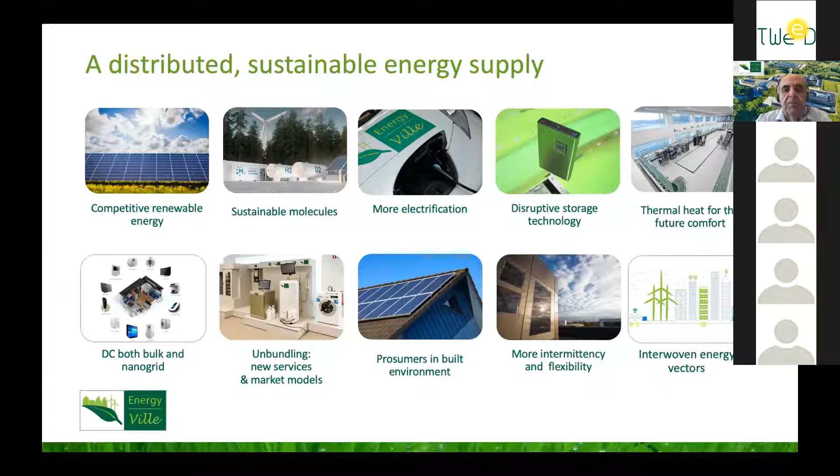So we have the thermal energy that can be used, for instance, as a storage device for electricity, but also we need sustainable molecules. Part of it being hydrogen, but also other parts being methanol, methane, etc. So this is what we are working on.

And dear friends, let's be clear, what the Commission has said now, being 50 to 55% of CO2 reduction by 2030, will mean more than the clean energy package, which stated 32% coming from renewables. It probably will end up with 40 to 45% of the energy coming from renewables by 2030, which will probably lead to more than 2/3 of the electrical energy coming from renewables within 10 years. So the whole debate in Belgium of how many percent X and Y we are going to have is a very futile debate.

The thing is, let's work on it and see that we can get to that 2/3 of renewable energy in 10 years. This is a challenge that in my long career has never been raised by the politicians to our sector. So really, it's a very major challenge. We have to do something about it. We have to look also at the energy efficiency.

And we are going from that classical model, we all know, to a new model with a lot of energy vectors, but also a lot of data. And I don't have to bring you in detail on that. But if you go to the overall idea, you see that in the energy system which was before, you get 3 energy bills at home every month, or every 3 months, or every day partially, being the energy bill for the car, the energy bill for the heating, and the energy bill for the electricity. Those 3 energy bills will be brought into one.

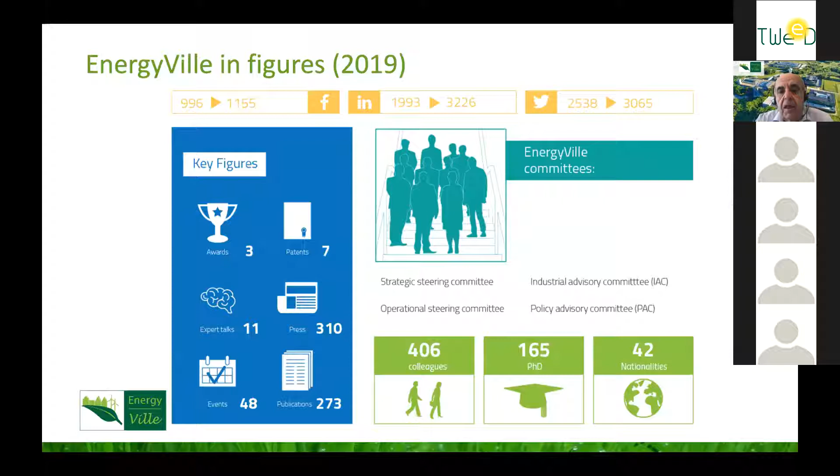On the site, there are roughly 2,000 people at the moment. It's going to be growing. CMI, Cockerill, is also investing in a new building together with LRM on Industry 4.0. So the place is booming, I think. And if you had been there 5 years ago, except for the old to-be-renovated buildings, nothing was there. Everything was built over the last 5 years. So if they say that China can do things much faster, that's true.

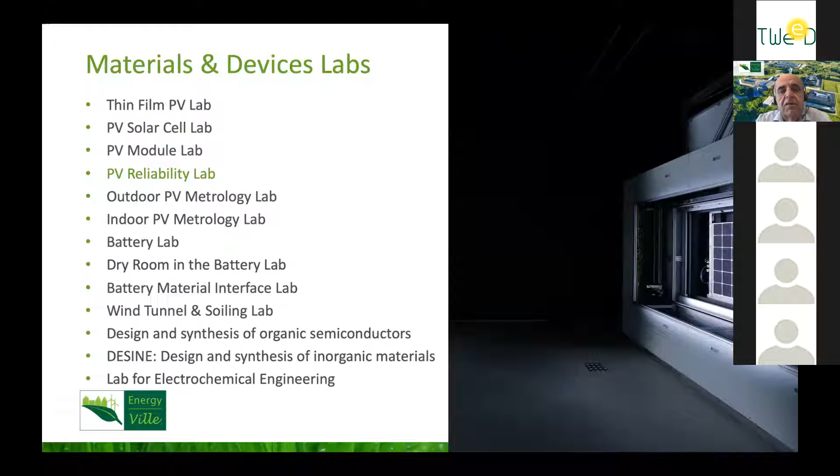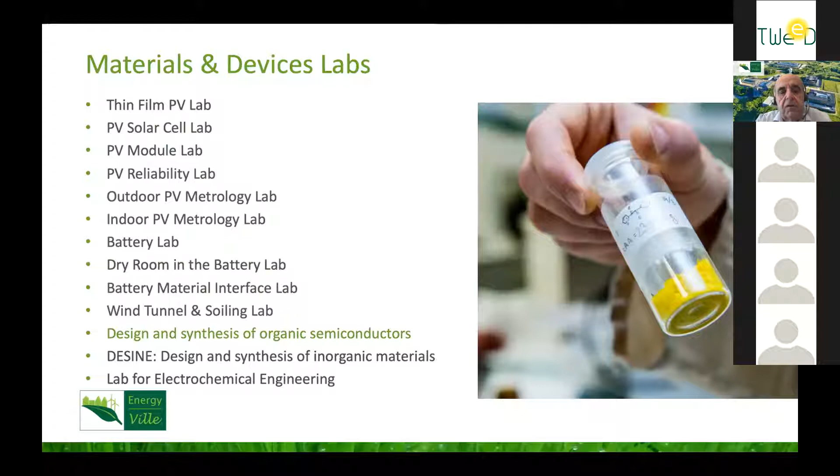We have a laboratory on material and devices with thin film PV lab, the PV solar cell lab, the module lab that's around, lab on reliability, and we don't make a distinction between EnergyVille 1 and EnergyVille 2. This, for instance, is in EnergyVille 1; the previous ones were in EnergyVille 2. We have the outdoor PV lab, which is on EnergyVille 1, metrology, again 1, and you see here then the battery lab, dry lab for batteries, interfacing lab, and the wind tunnel, then the design of organic semiconductors and also perovskites, design and synthesis of inorganic materials. Some of the labs are still in Hasselt and also at IMEC, but they are moving.

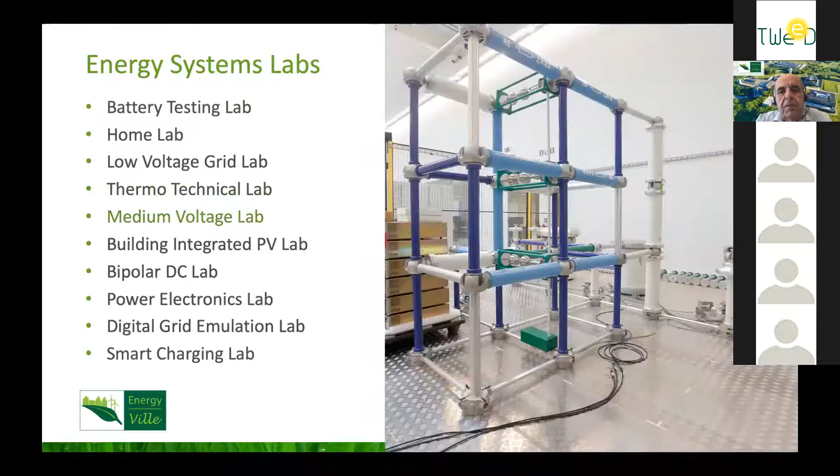Then you have the system labs, the material labs for batteries you've seen already. Here you have the testing lab, which is now being enlarged, and I think that the movie you will see later on, the visit you will have later on, already shows the new lab. This is the home lab, where we work with intelligent appliances, low voltage lab, thermal, medium voltage, the PV integration lab on EnergyVille 2, the DC lab, one of a unique lab in Europe, being totally ready for real applications on low voltage home DC.

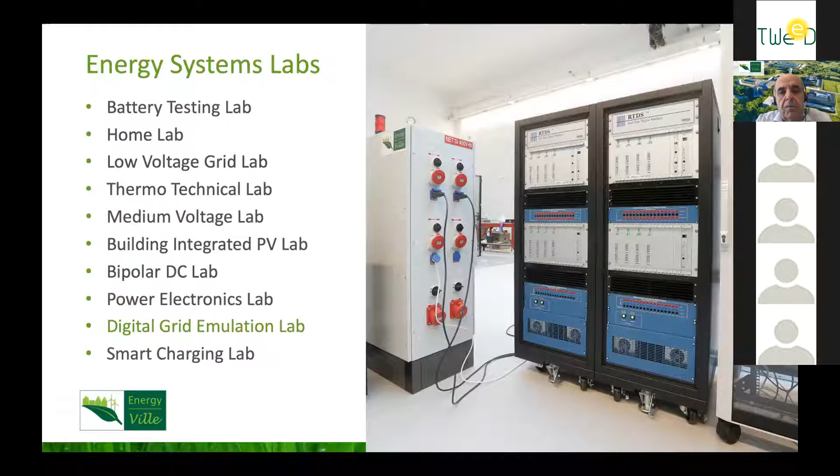And then the power electronics lab, grid emulation. To give you an example, we were the first lab to test the relay on HVDC for Mitsubishi. We're collaborating with a number of companies. And then we have here the smart charging lab, where we use our own vehicles to really play around with what we're doing in charging. For instance, intelligent charging, where the vehicles are charged with respect to your own calendar and the time you're leaving for home.

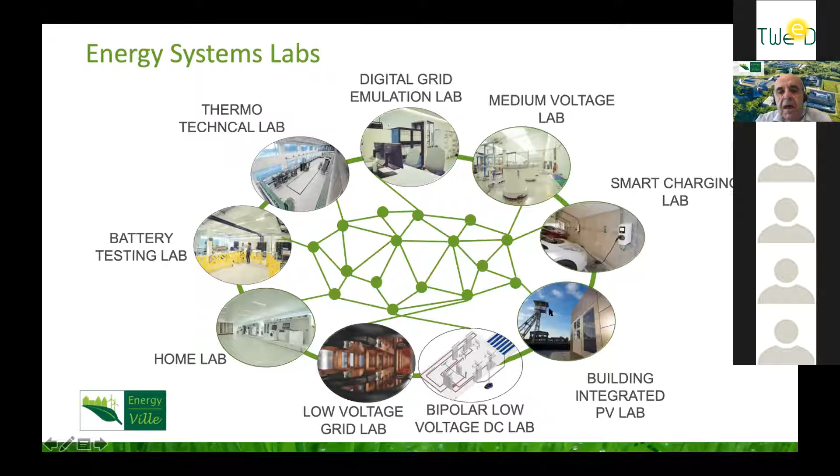So this building itself is a lab. All the labs you have seen are linked to each other. So we can have, for instance, a smart charging lab being supplied by the PV on the roof, by a DC, at the same time being linked to the batteries. And so you have a lab of labs being the building itself. And in the building itself, we are doing an awful lot of research also on energy in buildings. Energy in buildings, and I told you with the comfort being one of the major aims of the energy transition, we have taken on the challenge to really see whether we can live up to our own words, that we could walk the talk.

And EnergyVille 1 has been built to the BREEAM standard. BREEAM is a British standard that stands for environmentally friendly buildings, energy efficient buildings, with a high level of comfort for the people that are working there. So if you look at what's in the building, you have to look at the water consumption. People have to be able to charge vehicles. There has to be room for bikes. During construction, you have to look at the waste treatment. And we were very scared. But at the end of the day, like a student, you go to BREEAM, you ask, is the design okay? And we got excellent for the design.

And then at the end, when the construction is done, they come in to have a check. You are checked continuously. You have to give data in continuously. And we got the highest certificate, outstanding, in the post-construction, and it's still monitored. So yes, we walk the talk, and we are proud of that. And that building is working as we think that building should work. And if we ask our collaborators, maybe they are polite to me and don't want to say the truth, but working there is fun. Getting there sometimes is more difficult.

And then we go one step up. We go to the district design with optimal integration of renewable energy systems, the thermal-electric modeling and network design, to prove that you can better optimize in a district than every individual house. And then we go to fault detection and management of electrical grids, but also of thermal grids. Then you have decision support of larger grids and towards HVDC systems. And then the top of the list is energy monitoring and policies with scenario modeling and training and management in interoperability.

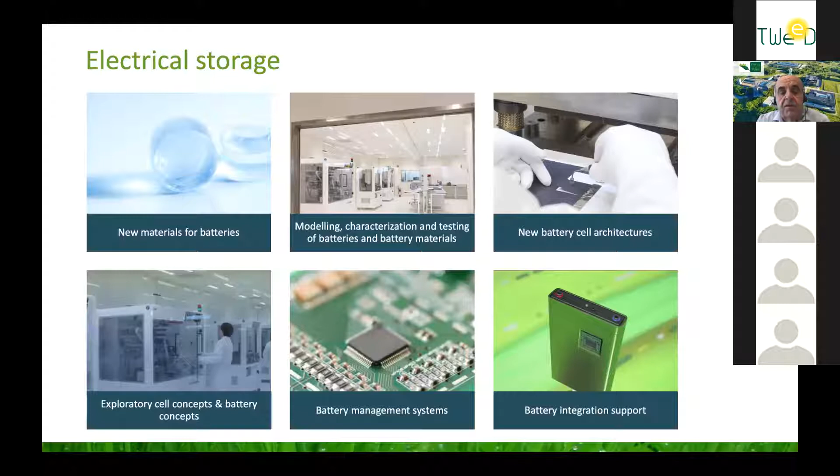To give you an example of people that are interested in that research on BMS, one of the problems is with leasing companies. What is the still available value of an electric car? What is the lifetime left of a battery? How can a battery be used as a second life battery? There, the battery management system certainly will play a major role. And for instance, people that are interested in that are Belfius, KBC, and that kind of companies.

Thermal storage with control and compact thermal storage, integrated storage concepts will be on site. Then power electronics and converters with new materials, gallium nitride, then the magnetic components and reliable converters, but also converters for heat recuperation, low temperature power generation, and heat pump flexibility that then can be used in electrical systems.

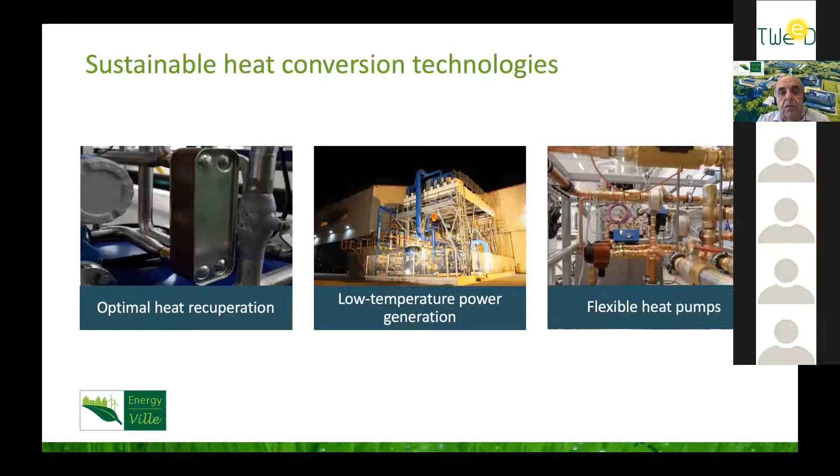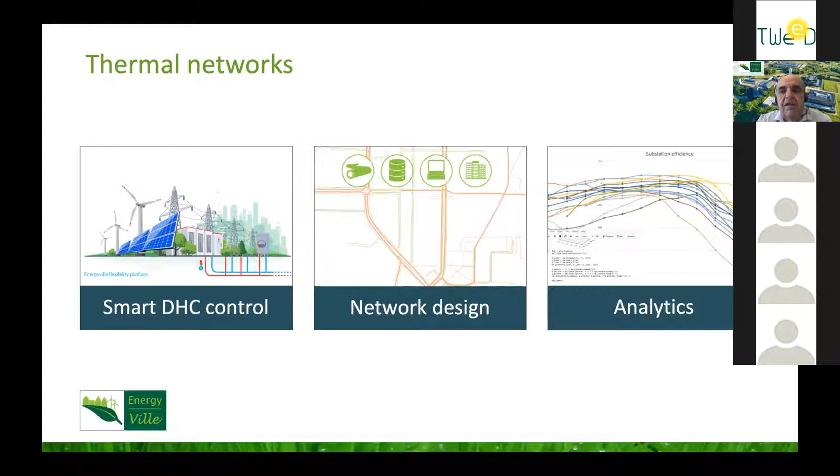Thermal networks with control systems, distributed control systems, network design, and the analytics of substations, for instance, and their efficiency. Strategies and market, with the energy market design, we are doing tariff designs, etc., interoperability, flexibility trading, and long-term energy planning. And also we go to energy policy input.

I hope you have seen that we have a broad system, and I see some questions. But I hope that really you can see that it is an open lab. We are there to serve society, and serving society for us means far more than the local society. So we would like to work together. We are looking for collaboration. We offer what we know, but we want to learn from everyone who is part of the system. We will need brains to do this.

And I see a question of what kind of thermal energy is linked to the PV, a question of Renaud Dachouf. We are now working with Aztec on a mirror type of application for PV, and that will be linked to the thermal grid, and that's where we're going to have the first link between them. We are also going to work on tandem cells, where you in the same moment produce electricity and heat with the same surface. So that's the way they are coupled.

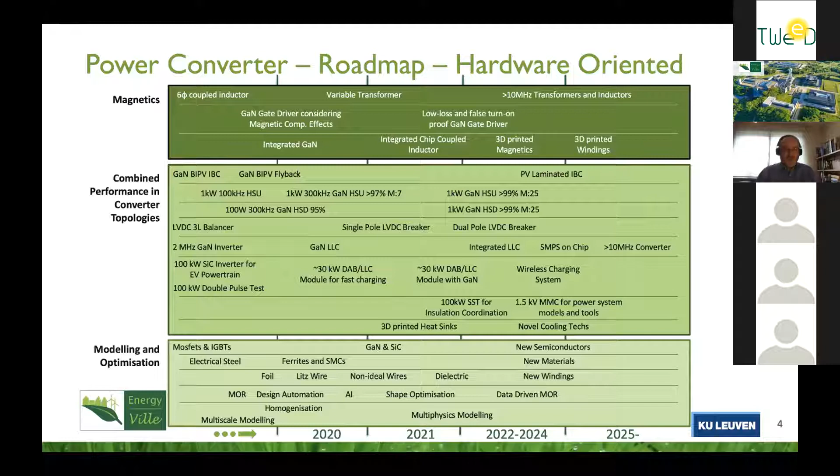There are many classes of circuits. We work on several types, but also several power levels. It goes down from several watts to several hundreds of kilowatts that is being made. And in the back, we have people doing the modeling, design, and simulation of all of this.

Now, the circuits that we recently realized were, for instance, for photovoltaics, we've been making isolated and non-isolated circuits where we try to use the gallium nitride converters to show that we can make circuits that are on average 4 times smaller than the classical silicon solutions. For the DC grids, we've been making balancing systems, balancing converters based on silicon carbide.

There we need another kind of technology as the current levels, especially if you've got protection problems, go up a lot. And in the end, we are now working on a prototype of a small scale MMC converter so that we can study also the medium voltage types of circuits.

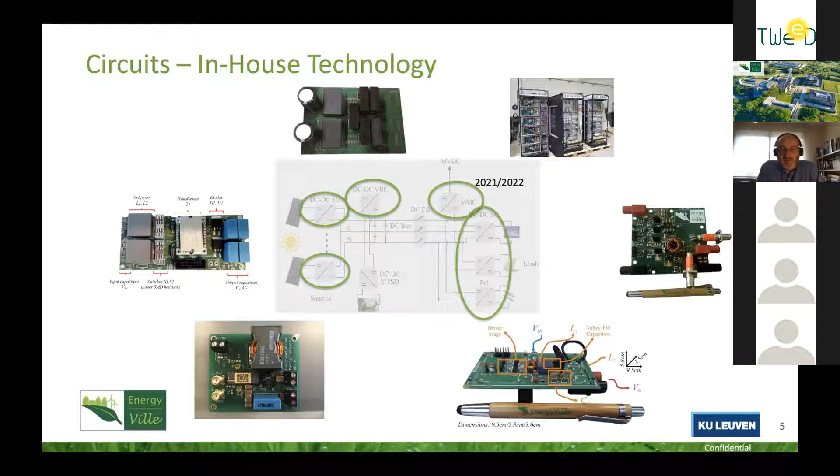On the load side, we go to the totally other spectrum of the power range, where we make extremely small, extremely compact, dense circuits, for instance, to interface small lighting loads, small batteries like charging through USB-C, and so on.

These circuits, they have all found a place in a test facility that we have developed, half of what we call our home lab, and I hope to be able to show you on that virtual tour later on a little bit of it. Half of that home lab, that's where we build microgrids. Half of it is AC, the other half is DC, and there we have created a very unique test facility to test all of these technologies and their interfaces.

We made it a bipolar grid, so that means we've got a plus, a minus, and a 0. This is the most generic grid, and this is also the grid that allows you to go to the highest power levels, because in the end we've got 1 kilovolt of maximum voltage spread. And this also allows us to host a new standardized voltage, which according to the new proposed international standards will be 375 volts.

We have built a system for 100 kilowatt. Currently, we are expanding it again with extra cabling so that we can house a small demonstrator where we show all the typical house loads running on DC, like the kitchen equipment, and on the other hand, the more high power loads for distribution system.

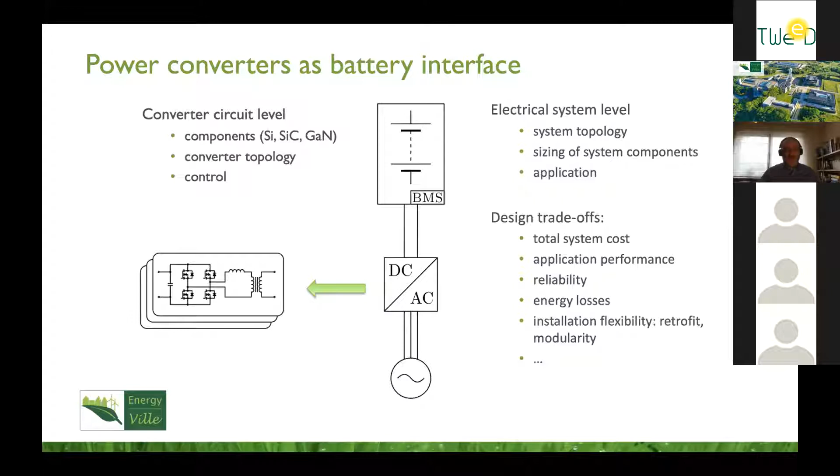Now, if we start from the home, there we see clearly a trend that the classical PV converters that some of us probably have hanging at home, that they will be expanded with a battery unit. There are DC coupled units and there are AC coupled units.

As far as we can see, and as far as we can test what is on the market, the DC coupled units, they behave better, and they have the possibility to be expanded to a DC grid. And then we end up again with our vision that DC will play a much bigger role in the buildings. I think also of the charging of the new electric vehicles.

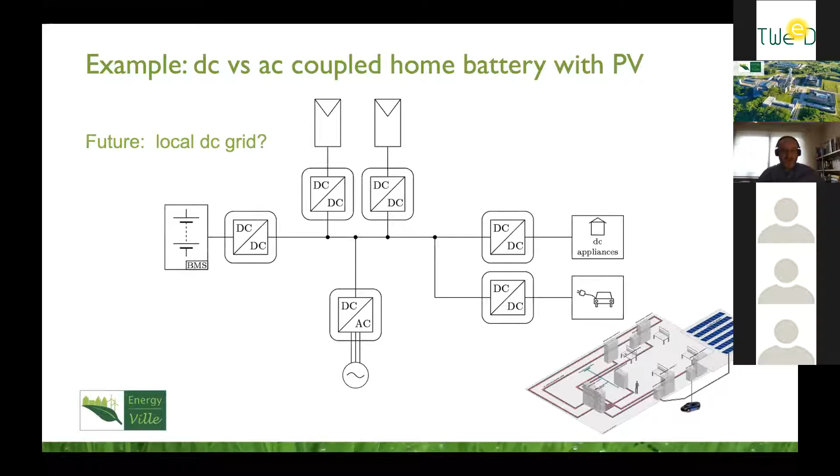Now, of course, we need to address this scientifically. So there are people working on the optimization models, the design models, so that we can find out what is the optimal sizing of the battery packs that you need to put in buildings with PV, what is the optimal interface dimensioning, and given certain tariff structures or other business models, how do you achieve the fastest payback or the best profit out of this system. So here we link also the energy economics with the hardware sizing.

As mentioned by Ronnie before, we try to test this all in practice. So we have many of these systems in the lab. Unfortunately, you cannot have a look at it, but please come over later. We are testing all of these systems in practice. We have got the facilities to do very low powers all the way up to high powers. It's no problem to have a few hundred kilowatts of testing.

We even have a high voltage test facility that is one of the unique ones currently in the country. And we can do a lot of solar related testing with our test tracks and several different configurations of photovoltaic panels that we have on the two buildings for the moment.

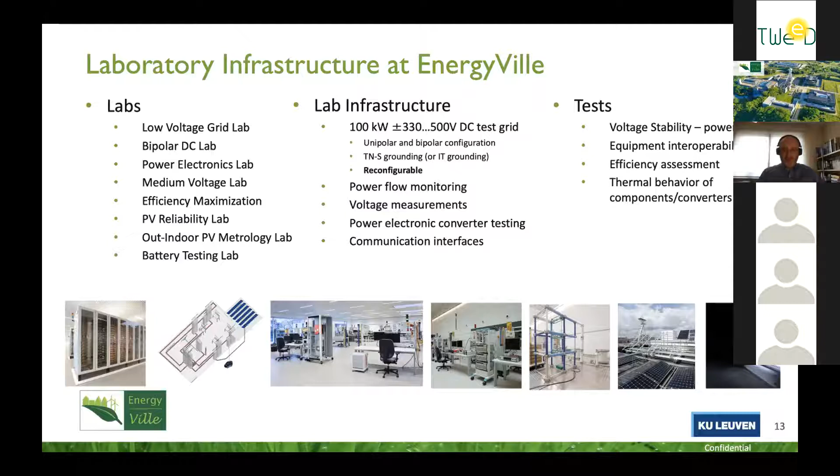Okay, now, secondly, I wanted to present you a little bit about the control aspects, and that's mainly my colleague here, Deconinck, who's excused, who is supervising that, because you can always optimize the hardware, but in the end, somebody's got to find out what you will do with that hardware on the operational side. And there we look a lot at distributed control and the optimized use of the distributed storage assets. Now here's Deconinck and his researchers.

They have, for instance, been looking at the value of the storage, especially considering that you can use these storage systems for several energy-related services. What I, for instance, mentioned before in the frame of the PV systems, that is self-consumption, maybe a little bit of PV, a little bit of peak shaving. But if you go on the ancillary services market, you can also try to value or monetize your battery by offering frequency containment services, frequency restoration services, and so on. The good old primary, secondary, and maybe tertiary level of reserves.

But the challenge is, how do you combine all of these services on the same type of assets? Geert has been looking at this together with Jonas and Bert, for high power batteries, large batteries. For instance, this is a result where they looked at the different control scenarios for a Tesla type battery, so a large outdoor battery. It's actually an existing system in the province of Limburg, and they have been looking at how to optimally use this.

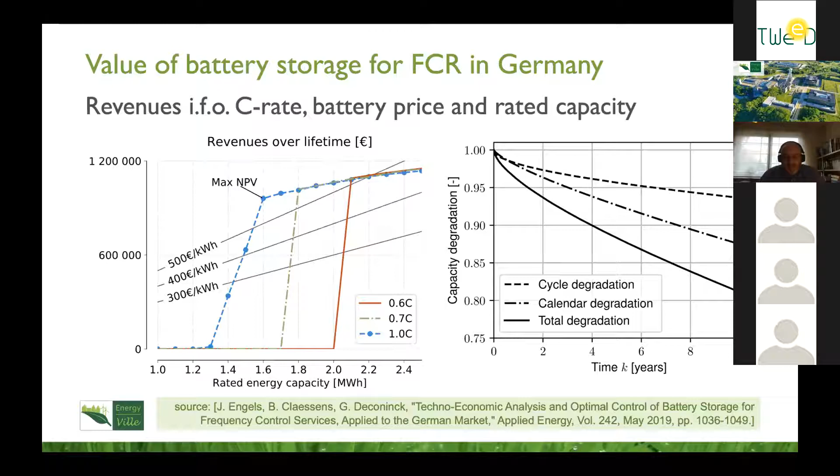This involves a lot of stochastic optimization, and also not just how to make most money out of it, but also how to gently use these assets so that you don't wear them out too quickly. So things like degradation of the assets were taken into account. We did not only look at this problem for the large centralized battery, it was also studied for fully distributed batteries located in several houses. So the problem was expanded then to a large-scale distributed control problem and the related stochastic optimization.

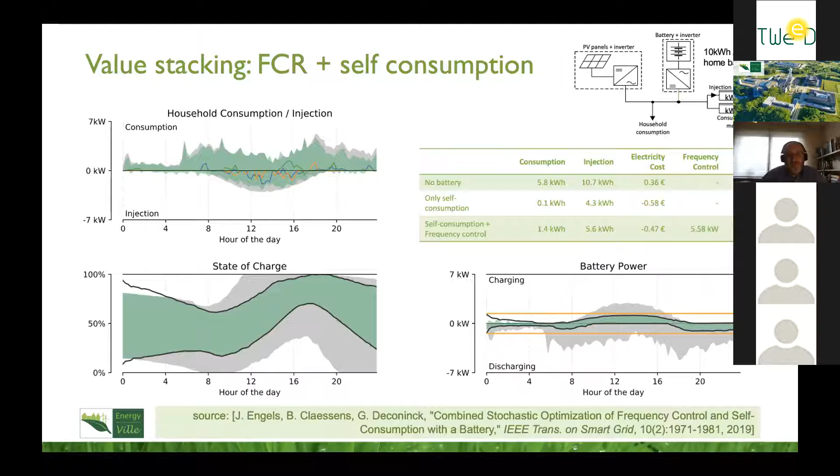And there he could show that you can make a good balance by still implementing the self-consumption goals, which is good for the energy bill with a large peak component, but at the same time the spare capacity can be used to offer reserves. Of course, these things are still in simulation for the moment, but we are doing the first tests with some reference systems in our labs as we speak, to show that these things also work in reality. Now, looking at the time, I'm going to conclude here.

So to conclude the part of distributed control and optimization, this is of course more something that you do on the computer. You need lots of data, good models, but there we complement the work with the people working in the lab and working with the hardware testing very well. We've got data scientists and power electronics specialists who all work in the same teams and learn from each other. We've got the people doing this optimization. We've got the people doing the designs of all the hardware that is needed. So in the end, we can cover the whole value chain from the battery itself all the way to the application, also in EnergyVille. Thank you very much.

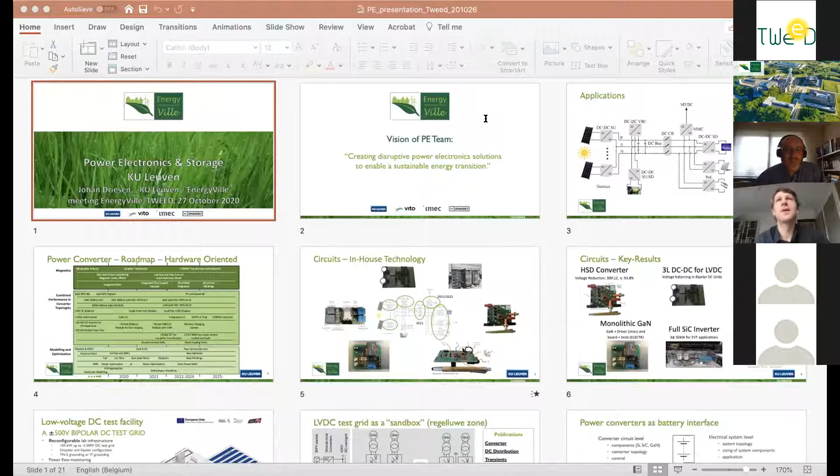I have a question. You have mentioned the DC nanogrid. For the buildings, it's more and more a hot topic. We can suppose that we can integrate all the DC components directly inside the building materials. And so for you, what are the main challenges over there? Because we see there is a potential, but right now the projects that we have in DC are more industrial-based projects. So what are the main challenges in this area? From the market view, it's a mix of technological, but as well security and market.

Yeah, I agree. I know the Miracle project very well. Indeed, it looks more at an industrial feeder. Now we focus more on maybe a smaller scale of DC application, but I think the challenges are very common. The challenges are first of all found in protection and safety. A lot of people, if they hear DC, they still get an allergic reaction because they learned in school that AC is the only safe solution. But I'm not saying that DC is safer. I'm just saying safety is different.

We have shown that you can also do things like residual current detection, fault interruption, but the characteristics of all the faults are different, and we are just learning by doing. And there we have a bit of a chicken and egg problem. In AC systems, they have got 100 years of experience. Here we are working with technology that is developing, and at the same time, there are no clear regulations yet.

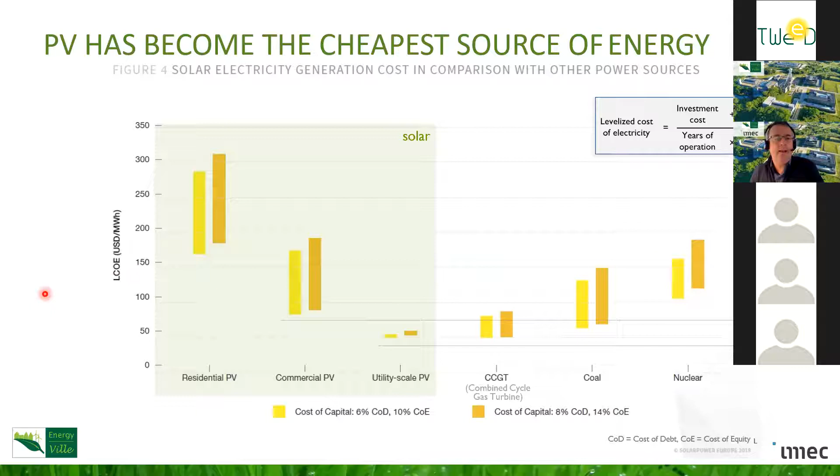are going down. So this means PV is there, will be there, and we have to take care that we can connect it to integrate and take care of the intermittence, similar as we have also with wind, for example. And so an element that is important in this is the storage.

Further integration of PV becomes very important, because next to PV plants, we will have it in residential, we'll have it also in buildings, and Ronnie Belmans in the beginning already mentioned that this is an important development that we're working on in EnergyVille. So PV in that sense becomes a building component where cost is a challenge, and also the flexible customization. And that is something that we're working on together with partners also in Wallonia.

Typically, these building integrated PVs are quite a manual way of working because you have to adapt all the different modules to different sizes, fitting the whole building and the different parts of the building, which all may have different dimensions. And if you have to do this in a manual way, it's quite expensive. But we're moving into a solution where you can do this in a scalable, custom automated way, enabling also for sure lower cost in a fully automated industry 4.0 concept.

We have a tool at our EnergyVille labs, which unfortunately you cannot visit, that allows us to do so. Through pick and placing, we can actually interconnect them in a clever way with a new material and a new interconnection style. We can actually interconnect these PV panels having different dimensions, different sizes automatically assembled, which allows us to bring down the cost of this type of fancy buildings.

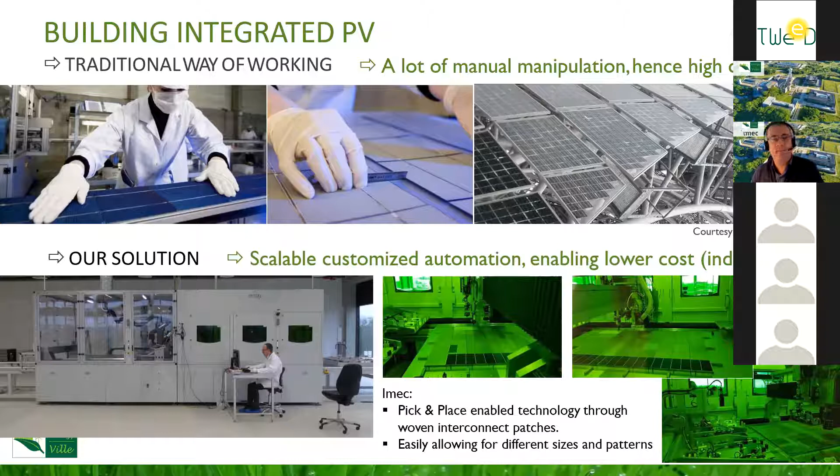We don't do this purely on the module level itself, but also integrating them into the building components together with our colleagues at the KU Leuven. And you might, of course, recognize these buildings here in Genk. So this is an important element of our work in EnergyVille as well. But of course, as mentioned, PV is a key element in renewable energy next to wind and other sources.

And this brings us then also, well, how do you combine this with storage? Because PV generation is mostly during the daytime, of course. And we have energy users also at night and the evening and the morning. And we need to shift the generation peak of PV into these other moments during the day, and batteries are crucial for that. And Johan Driesen already showed some scenarios to manage this shifting of the loads and shifting of the generation of PV into these other moments during the day.

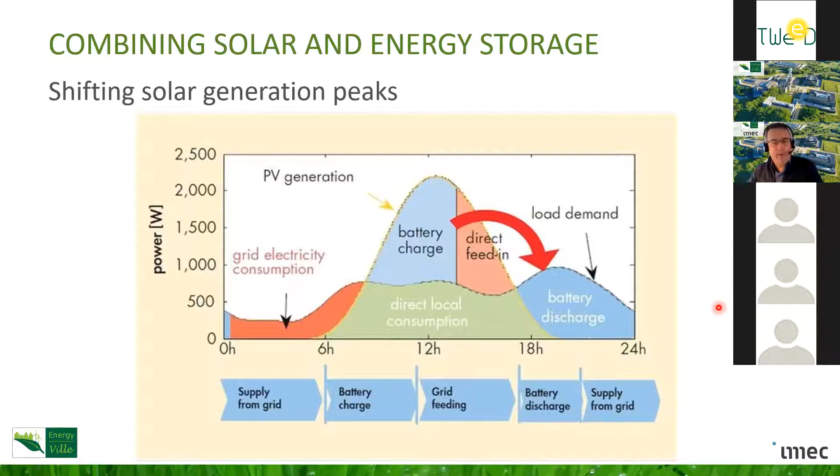Now, if we dig further into new battery concepts that are possible, well, you have to see there's a whole spectrum of battery applications and use. You have the smaller capacity, smaller power batteries and the higher capacity batteries. And with our technologies that we develop in EnergyVille, we can span the whole range. We have on the one hand the development of small, what we call micro batteries, consisting of a thin layer of a 3D structure.

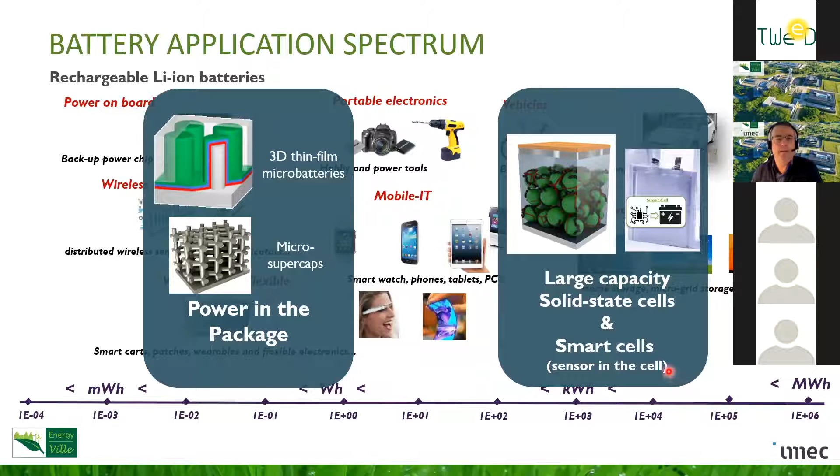That can be used for power in the package for all kinds of small and novel applications, as I will explain further. But what is more important for the topic of today is, of course, this large capacity storage for grid, for automotive, for energy storage at larger capacities. And this is then important to also link this with smarter cells, smarter batteries. Now, how does our new solid state battery concept work?

We can have more energy in the same volume because we have a more dense packing by using nanoparticles. We can even have faster charging, although the electrolyte is the solid component, because of the high ion conductivity that we have in this solid electrolyte.

And we can have a longer lifetime because we have protective coatings that we apply onto these particles or this mesoporous structure, which allows us to guide ions and actually have less stress in between the different components. So these are the basic elements of our new solid state batteries. And what do we want to achieve with this?

If we see the energy density evolution in watt-hours per liter in view of time, we see that these traditional wet lithium-ion batteries are actually coming to a limit. And it's not only us who say that; this is shown by the nature of this type of wet lithium-ion batteries, that they come to a limit around 800 watt-hours per liter. And if we want to go above that or break this limit, we need to move to these other materials. And these solid state batteries are expected to be the technology to overcome this.

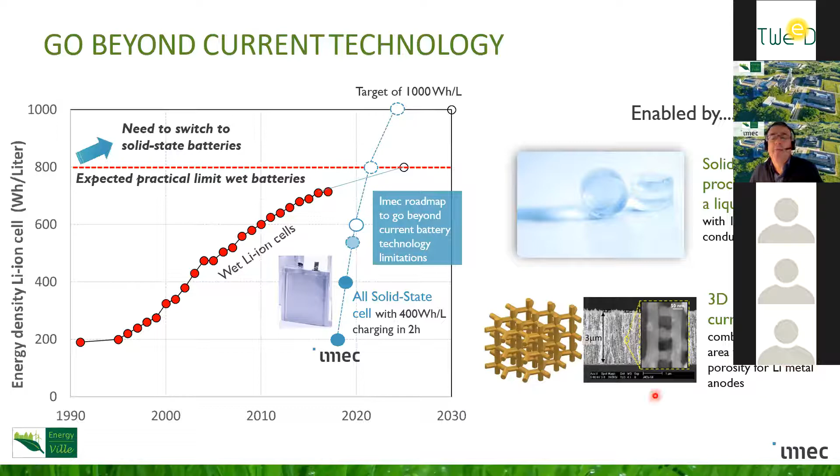Now I have here a movie that shows the concept of the batteries that we are developing, and I will try to run this. I hope the sound will come through, and if not, please let me know.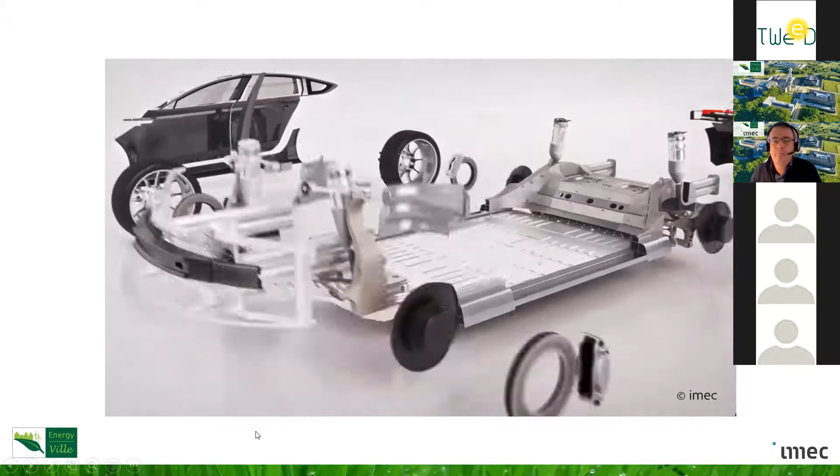I hope you hear the sound. No, not yet. No? Okay. Then I need to switch. Just a second. Just a moment. Let me switch here to the system audio. Sound is better now? Not yet. Or maybe you can speak, just presenting the video. I don't know. Yeah, well, I thought I switched the sound. I thought it was working because I hear it myself, but okay.

Yeah, so we have the liquid precursor that is coating the films. And this makes it compatible with current battery manufacturing, because there wet electrolytes are also used, and we use it here also. We impregnate the film with this wet electrolyte, and then it solidifies. And by the solidification, you make an intense contact between the different particles, allowing you to have this very dense and intimate contact between the different materials.

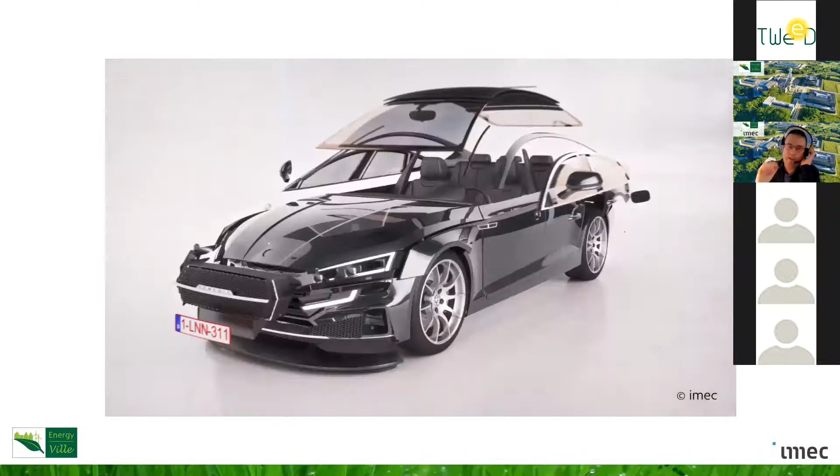And so we have these pores, and these pores, coated with this electrolyte, act as highways for ions, which go from the one electrode to the other. And we don't need a separator because there's a little bit extra of this solid material which forms the barrier between the different materials, the separator itself.

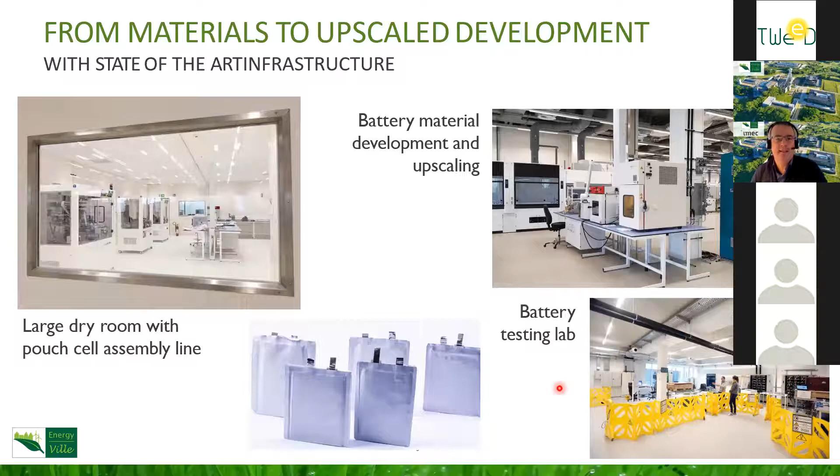Now, as a next step after the battery development itself, we see a future for smarter batteries. In this way, we can further increase the quality, reliability, and lifetime. So making batteries smarter by adding, on the one hand, a closer link to the controller, as Sergio will explain, but also integrating sensors into the batteries and the different elements themselves.

It could be thin film electronics that could be used there, which is a development we do at IMEC, where processors and different sensors can be made on thin foils. And we have also, of course, all the electrochemistry technologies I've shown you already a bit about that can be used for that.

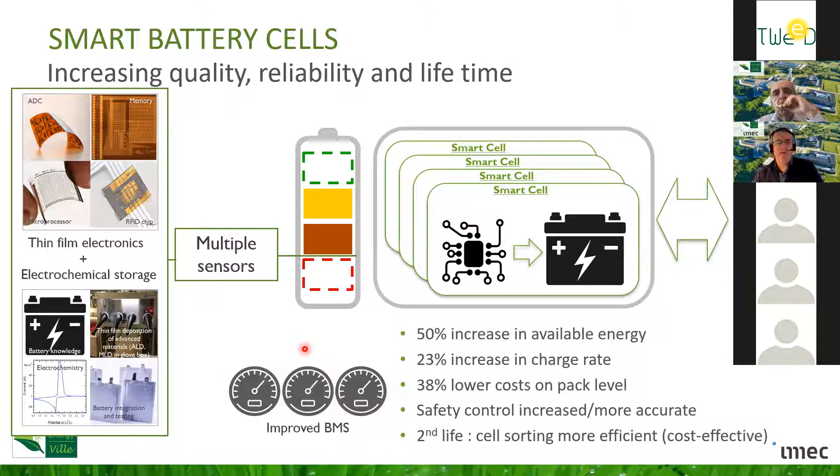And with these smarter batteries, with sensors integrated, we can develop an improved BMS system, as will further be explained, which has increased energy available, increased charging rate, lower cost on pack level, and can in the end be safer to control and to manage. And also towards second life sorting, there is a benefit if you know what has happened to the battery.

Now, apart from the large-scale batteries, as explained in the previous slides, we also work on what we call micro batteries. For micro batteries, we have a lot of material development going on, and important are also the interface layers. Now, if you want to make small batteries, of course, you can make small thin films, but these thin films can charge very quickly, but they don't have a lot of volume, so to say, to have a lot of energy stored in it.

By making these 3D shapes and covering them with those battery materials, we can actually still have the combination of very thin layers which allow fast charging, and in the end a big volume of material that allows considerable energy storage. And we see specific application domains for this, like medical implants, flexible thin batteries for all kinds of IoT and miniature applications. We are, for example, working here on the digital lens where this type of battery can be integrated and so on. So this is a specific market for this type of micro storage that we are targeting.

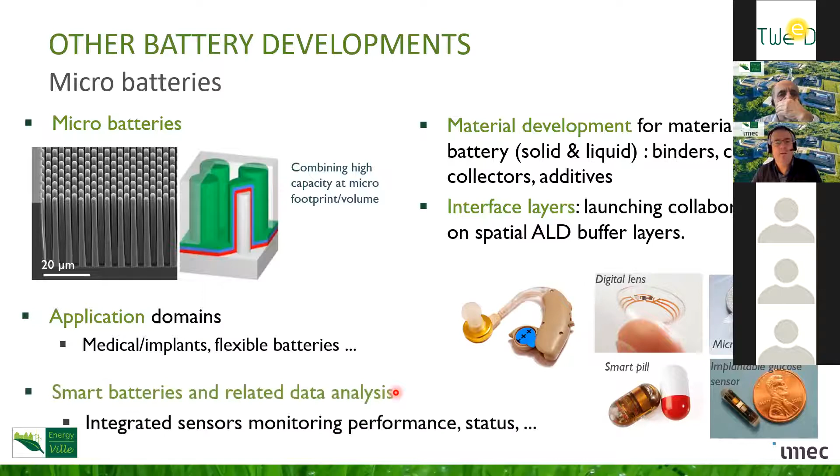So this brings me to the end of this first part, which is battery related, which is more for what you could call shorter term storage, which is essential, for example, in the day-to-day storage for electrical vehicles and so on. But if you want to look further ahead, there is certainly a need to do more, to have longer term storage. And if we can combine this also with using the carbon from the environment to transfer and utilize into this new kind of renewable energy fuels, that of course is an excellent advantage.

And electrolysis is a key technology block for that. From there, we can actually use renewable energy from wind, from solar, and transform this into these new energy sources, hydrogen and other carbon-based chemicals for the industry, for mobility, and for consumers. The key element is the electrolyzers, as mentioned. I won't go into detail. I think from our chemistry and electrochemistry courses, we are all quite aware of how this works.

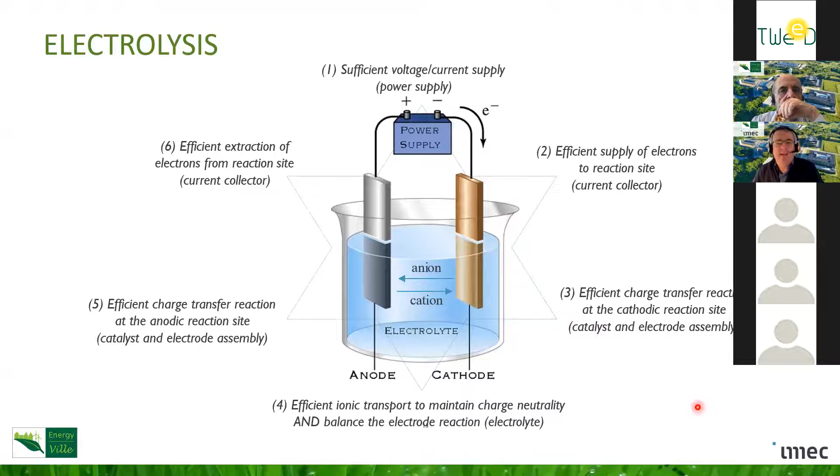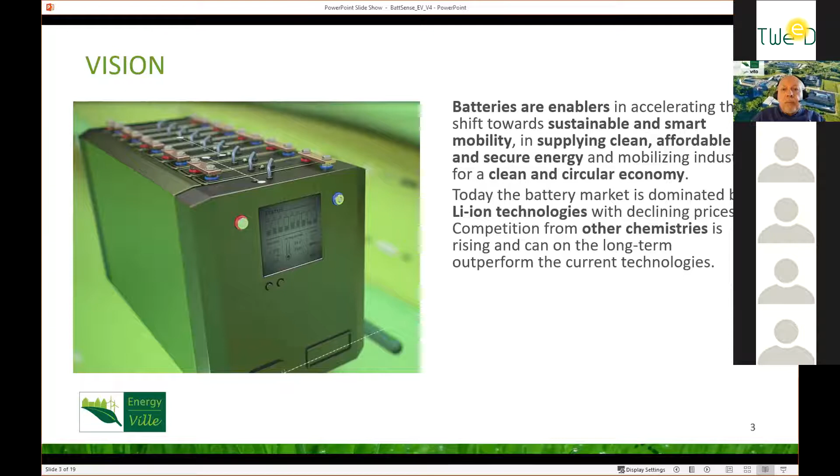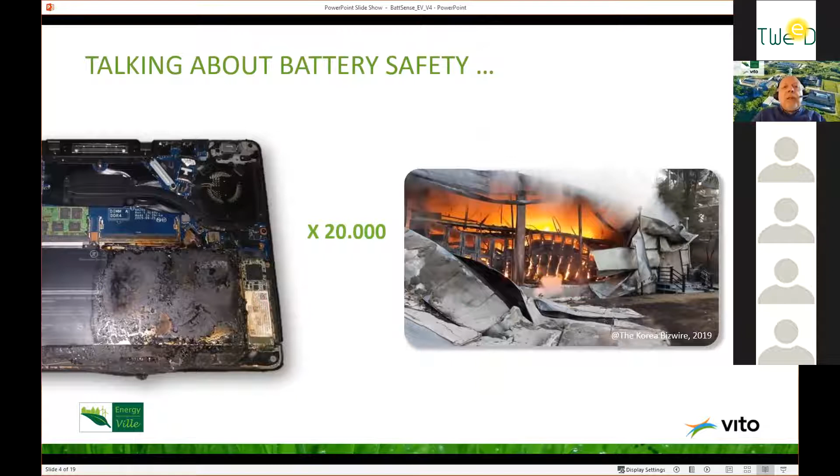And if you multiply that by a factor of 1,500 cells, it looks much uglier in terms of the results related to safety. And imagine that you multiply that by 20,000 in a battery container. What can happen? So safety is a critical aspect to operate lithium-ion batteries. But it's more than just safety alone within the batteries.

Think about electric mobility in cars. You want to have some certainty in the range. So you want to maximize the range so that you can still move yourself with the same perception as you had with traditional combustion engine cars. But it's also related to, yeah, we can't wait that long to charge the car, so it needs to integrate fast charging as well. These are additional aspects related to storage.

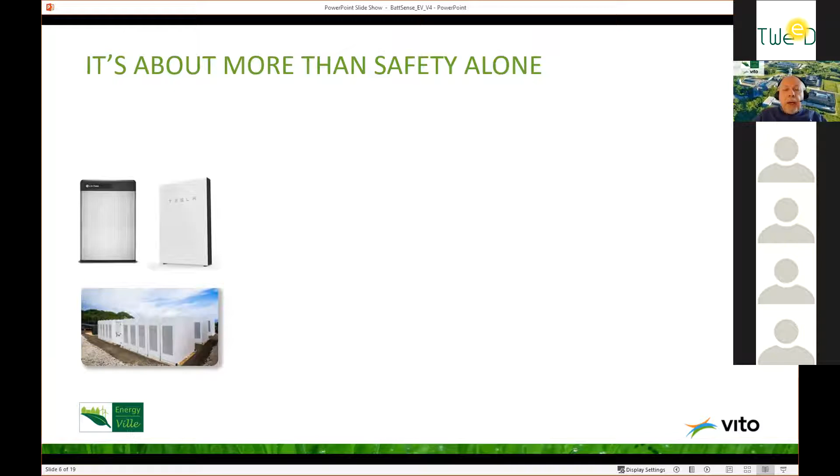When we look into stationary equipment, there is a higher share of renewable energy and, of course, intermittency that needs to be absorbed. But it's only worth implementing if you can increase the revenue generated by the storage capabilities. And finally, we want to maximize the lifetime of the battery. So it's not only repurposing that is important, but also the fact that you can use batteries longer in the first application area.

So therefore, we need to add electronics on top of that, which is called battery management systems. At Vito, we developed BattSense, a battery management platform, a concept that can serve all different stakeholders in the battery business. We concentrate the BMS development on sensing, high voltage control, and protection for the safety elements. It delivers a lot of diagnostic information. It also interfaces to the outside world and to the energy management system, and it allows the batteries to perform better.

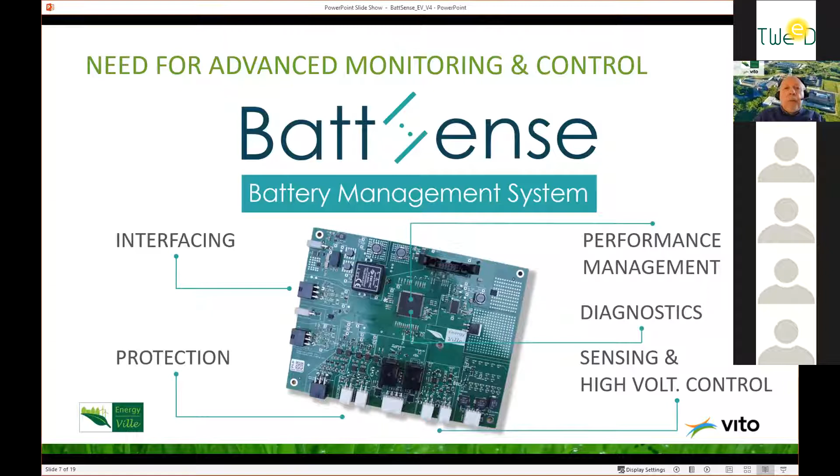So with the BattSense platform, the purpose is that we implement the solution that you need, and it's not always aligned with what the customers are asking. This is what we are going to illustrate here. The BattSense platform is a modular master-slave design configuration, and it's flexible in hardware and software. You see on the right-hand side that we have two different approaches for potential slave unit hardware implementation.

The platform is based on patented technology and algorithms that we developed within the frame of the EnergyVille collaboration. We are not only monitoring the traditional parameters of the batteries, but we are also providing with the battery management system the key elements for the energy efficiency of your system. So state of charge, state of health, and state of function are part of the offered platform. The development is based on battery expertise.

For 9 years now, we have had a battery test lab. And in March next year, we will probably be the biggest battery test lab in Belgium in terms of battery testing capacity. To come back to one of the questions raised regarding certification of batteries, we work almost like an accredited test lab. So we can guarantee the results. We calibrate our equipment every year, and we deliver a copy of the certification related to the calibration.

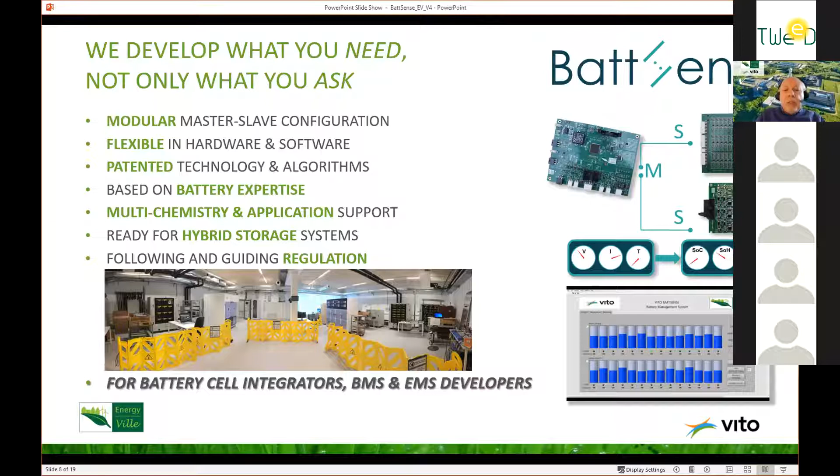And finally, we are following and guiding regulations. So you will see also at the end of the presentation links to the standards, to the battery EU standards that are applicable for all battery systems in Europe. And the product is dedicated for the battery cell integrators, BMS, and energy management systems developers for the integration.

The first reference that I want to talk about is a stationary application. This is the 250 kilowatt-hour battery system working on the microgrid integration in the frame of the Découvrez project in Flanders. It's a local community for energy.

And the second reference is illustrating the electric mobility, not on the road, but on the water. This is a leisure catamaran boat, which is fully electrical, equipped with solar panels and also propellers that have both functions: to allow moving the boat, but also to charge the batteries when the boat is running on wind.

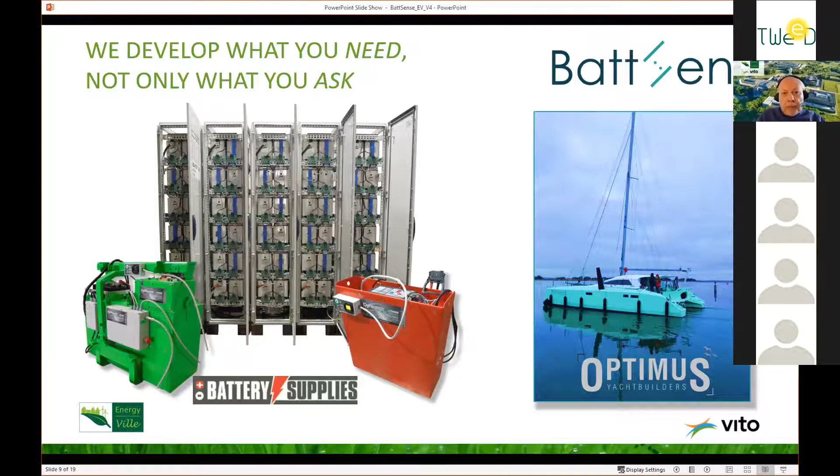Better performance and promising services related to improving the performance. When we consider working with lithium-ion batteries, there is a safe operating area under consideration. The batteries cannot operate in very high temperature, but they don't work either in low temperature, far below zero. It's difficult in operation. So a conservative way to work with batteries is to have a conservative safe operating area.

When you want to maximize the lifetime of the batteries, there is a preferred operating area. So you reduce your boundaries and you can expect a maximization in the lifetime of your battery, so working with the batteries longer. To increase the revenue, it's the opposite direction. You would like to overrule a bit the conservative safe operating area.

And for faster charging as well, you go into the limits of the batteries to allow faster charging, faster operation and faster availability. So we need, in fact, to look into a dynamic way of operating.

When it's getting cold, you have to reduce that safe operating area to allow the battery to operate in a safe way. But when the temperature is increasing, so when there are more favorable climate conditions, the safe operating area can change again. And the last topic that is of importance in the safe operating area is to take into account the effect of time on the battery as well.

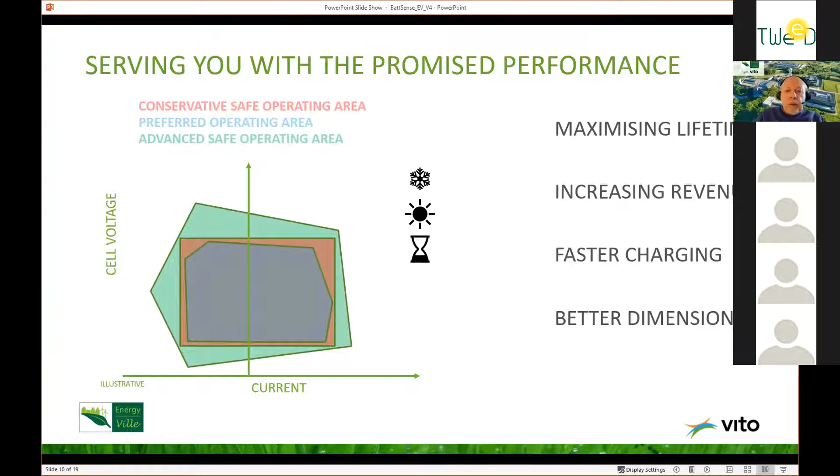So it leads me very easily to the battery degradation aspect. I'm not a real chemistry specialist about degradation in batteries, but there are a lot of aspects contributing to the degradation of the batteries. The causes are time, of course. The more you use them, the more you are, not abusing, but degrading the operation of the batteries.

The high and low temperature, the high and low voltages, currents, and other aspects. And you have here a few names of the elements that are seen in the battery: active material dissolution, surface cracking, loss of active material, lithium plating, and all that kind of stuff. But in fact, the result is a capacity fade and a power fade of your batteries.

And the question is how to use a battery to extend its lifetime without sacrificing the performance. That's where I want to point out a case study that we did, a PhD work, and we are further implementing that concept. So let's take a look at wholesale arbitrage: the freedom to use the battery whenever you want and trade the power on the day-ahead market. So you buy energy cheap and you sell it expensive.

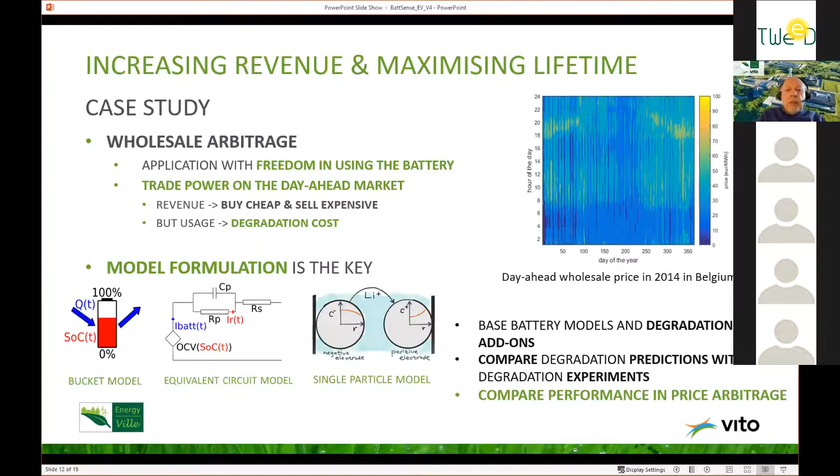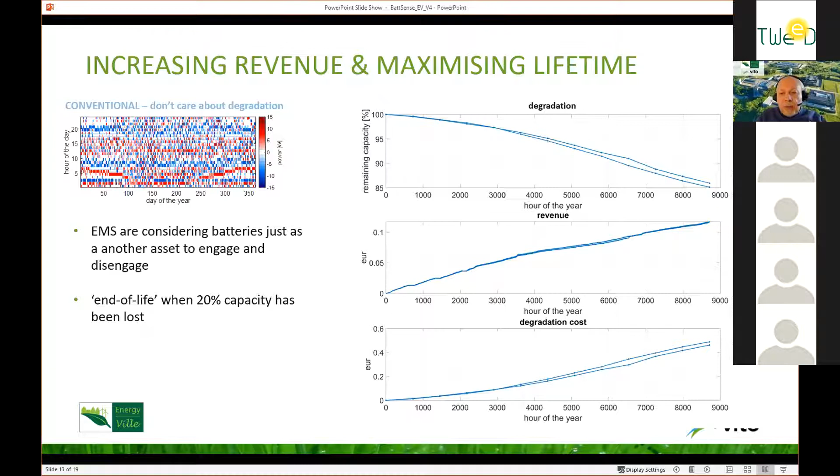So for these test results, we cannot share the brand of the batteries with you. It's confidential information. Nevertheless, what we see is that we have a compound growth in terms of revenue, or a stacked revenue, and the degradation cost is evolving over the time.

When you care about the degradation and you limit the capacity of your battery, for instance, to 80% instead of delivering 100% of the capacity of the battery, you can already take into account the fact that there is a reduction in the degradation over the time of the battery. So this is already a way to reduce from 15% degradation to 2.4 to 2.5% degradation. But of course, the revenue generation is lower, but the degradation cost is also lower.

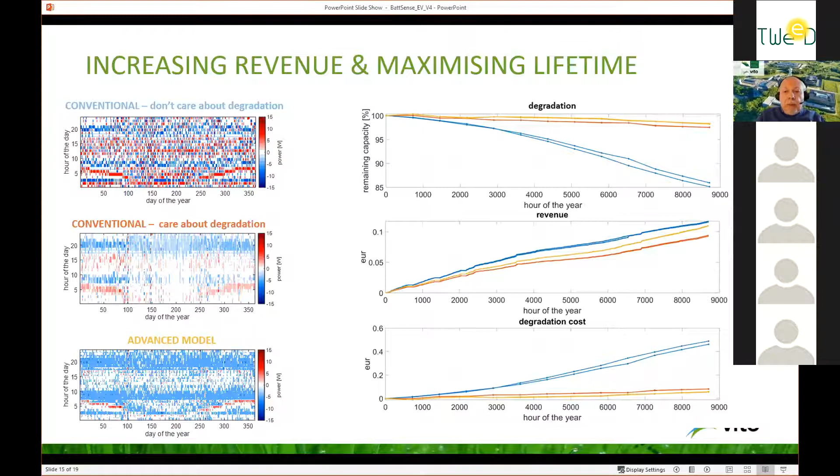Okay. If you implement additional capabilities in terms of an advanced model system, you can leverage on the degradation. You can increase your stacking revenue, and you can maintain the degradation costs. So the modeling aspect allows you, with the physics-based model, compared to the conventional approach, to reduce degradation to around 1.7%. So these are typical calculations based on measurements, and the real measurements that we did at cell level.

And the economic effect is that, accounting for the reduction of revenue and the degradation costs, we can in fact increase the revenue by 17% against the accounting for degradation model, and decrease the degradation cost by 30%. So it is, from our perspective, a valuable solution to implement to improve the revenue and maximize the lifetime of the battery usage.

To be also clear about where the model comes into the system: the EMS is carrying the model in the system, and the BMS delivers the parameters to feed the model. So it's really a very important relationship between the energy management system and the BMS that needs to be implemented.

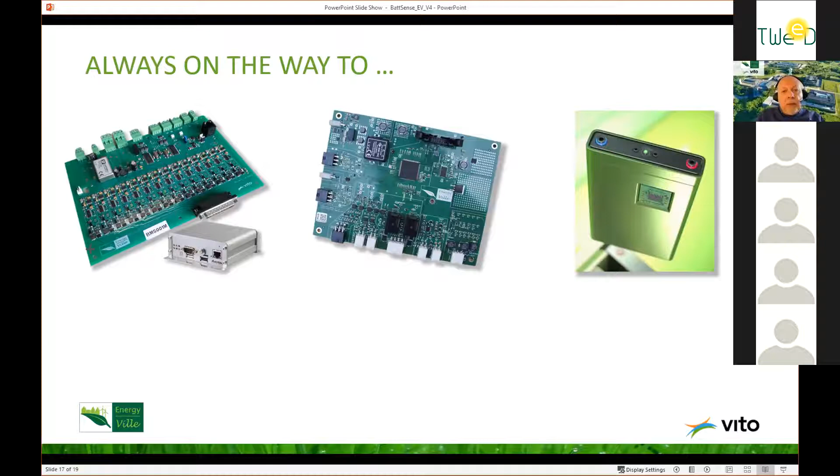So today we are at the second generation, and this is the middle picture of the evolution of the BMS. And we are aiming, as Philippe Peters mentioned in his presentation about the battery, at the smart cell concept, which will be integrating electronics directly in the battery cells to provide more intelligent systems, to improve safety and performance, to increase flexibility of the implementation, and to reduce the costs of the assembly of battery systems in the future. And this is the end of my presentation.

Thank you, Serge. I have two questions. One that I've received in private. It's a little bit linked with materials, and I don't know if Philippe is still in the meeting, but I will ask you. Lithium-ion technology has a lot of difficulties handling the cold. So why is it a good material to implement in cars? I see that Philippe is there. So the question is whether we use the right technology in cars right now, because they don't handle the cold easily.

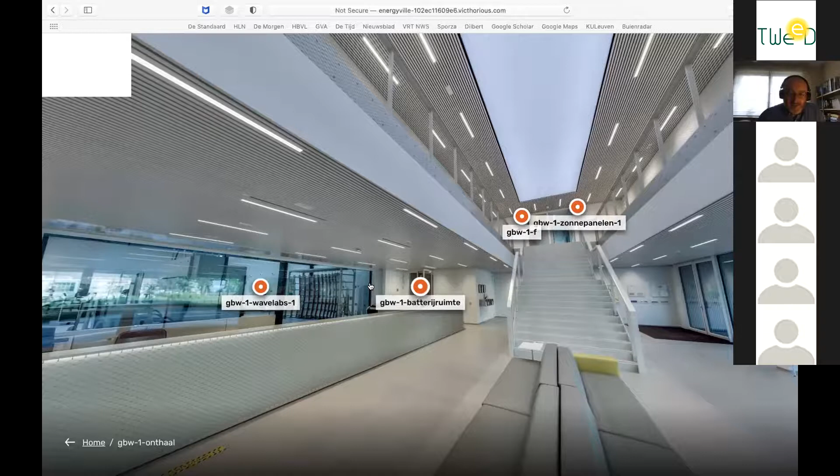Now let's walk around in the first floor, because I don't have a 360-degree picture of the basement. That is where the electrical cars are with the charge points. We still have to add that. But let's go to the first lab that we meet. This is the battery lab on the right side of the building. It's put there for safety reasons and also for easy access. That's where trucks can also come on the yard and deliver goods.

And here in the battery testing lab, this is before the expansion that will come now. You see on the right side, these are the cell testers. So in the back you find a lot of electronic loads and the equipment next to that are climate chambers. With these electronic loads you can perform rapid cycle tests, fully automatic, and in the climate chambers you can do the associated thermal cycles for aging. As Serge indicated before, we can do all kinds of tests, but not the destructive ones. It's not the goal that we blow up batteries in this lab.

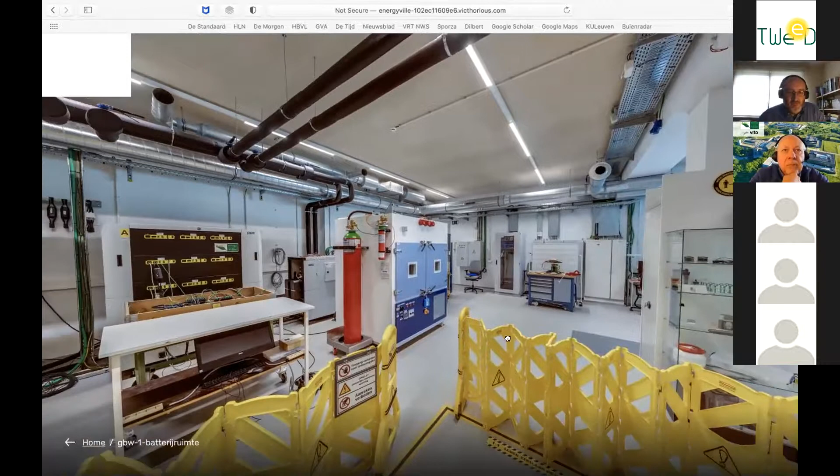On the other side of the lab, this is all about modules. So you see there comparable testing systems, but they are a little bit bigger. That's because in modules, you stack the cells together, you put a BMS on it, and you do the testing then at their power and energy levels. This room is always nicely climatized at 25 degrees Celsius. So in the summer, it's nicely cool, and in the winter, it's nice and warm to work there.

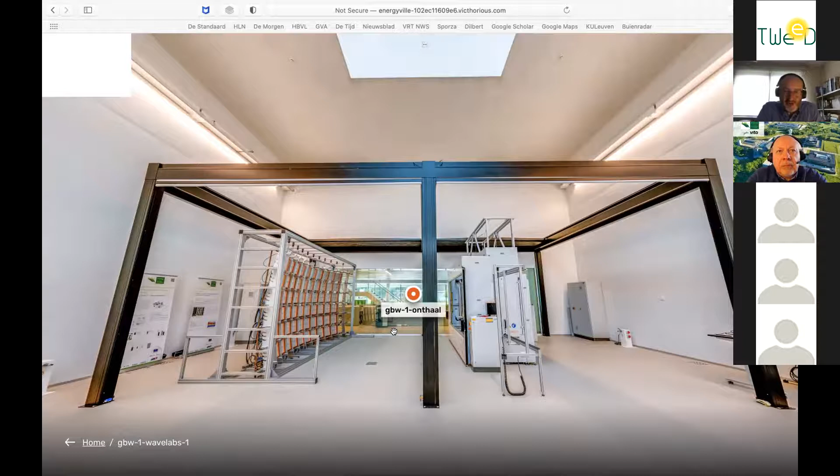If we go out again, we'll go to the central part of the first floor. So this is the lab behind the entrance. Let's move forward to the initial part. So here you can see the entrance where we were a moment ago. And the first nice apparatus that you see there is our WaveLabs system. This is in fact a giant black box, but now the curtains are all open, so you can look through.

And what you see there on the left side, I'm indicating that now, I hope you can see that, is a big multi-square meter LED light source. This light source can generate 1.5 sun equivalent. So we can put a lot of fake solar energy onto the solar panels that are put in the test unit in the middle. There's a second light source at the back that is for bifacial panels, because a lot of solar panels these days are bifacial glass modules. So you also capture light, usually indirect light, from the back. So to test that, you also need to be able to provide light from both sides.

And that makes this test device unique. As far as I know at least, there is no second one like this in the world. And the solar panels in the climate chambers that you see here on the left and the right, they are prepared and aged for the tests. We do not only do the classical solar panels. What you see here, this stand-up module is in fact a module from a curtain wall from a high-rise building, and there we integrated different types of solar cells.

In fact, this is a hollow module. Our colleagues from civil engineering have been studying how the ventilation works, how the cooling works with these modules, and the electrical researchers learned then how the temperatures of the cells are and where we can put the photovoltaic converters, so the power electronics inside these modules.

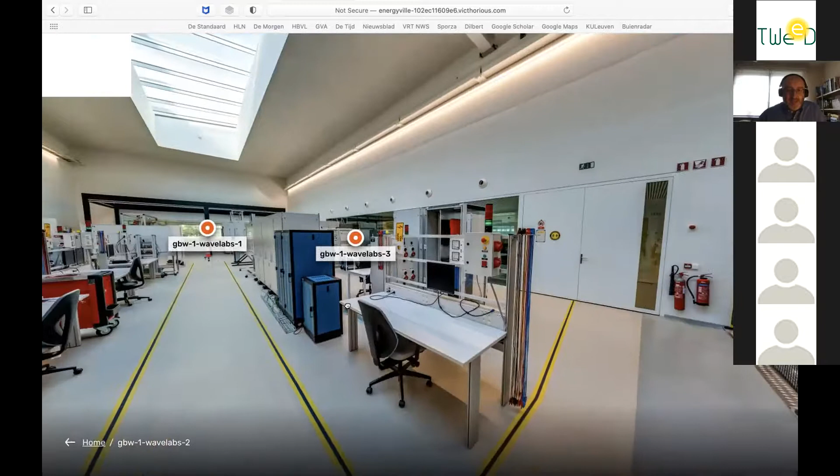And you end up with a plug-and-play solar BIPV module for big buildings. And we conceived it such that it can be plugged directly into the DC grid. Now, if we go further into the lab, let's see if I can walk behind here. Yeah, so we go behind that setup.

What you see here is our RTDS system, so our real-time digital simulator. If I go from left to right, this is actually a system that emulates a highly dynamic electrical grid, because we also do high voltage grid research, and of course you cannot play with a real grid, so the only solution that you have is emulating it. So that means fast simulation, and in this box you have a parallel computer. It runs professional grid simulation software.

The other racks are interfaces, and in the racks here, you have different types of input-output interfaces. There you can hook up typical grid devices. For instance, here in the middle, these are protection relays that are really used in high voltage grids. So in that way, you can test the performance of protection relays with a hardware in the loop system, and you don't have to blow up a real grid to test them.

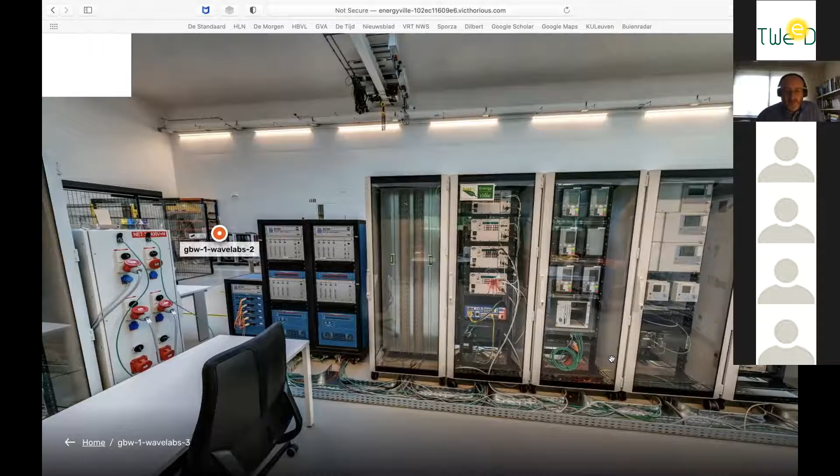It's not only for relays, it's hidden behind this panel, but we also test things like solar converters for voltage dip performance, fault ride-through, etc. The other devices are big amplifiers that help in the test. And the room next door is where system operators can come and do trainings, because you want people to train on an emulator, not on the real grid, of course.

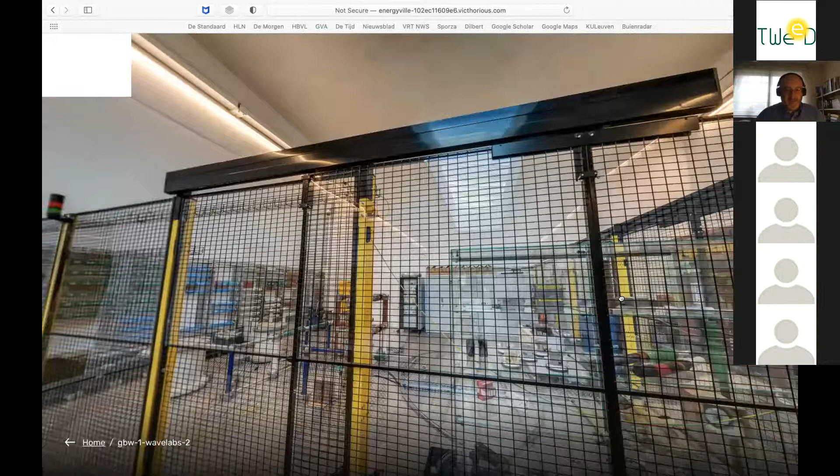If we move out again, I turn around, there's another testing area for power electronics, and here we have one of the testing areas, that's actually the high voltage lab, nicely protected, and there we can do the typical high voltage tests, surge tests, isolation tests, and so on. And this equipment can be connected to that grid emulator. So if you want, you can emulate a big short circuit there with hardware in the loop.

Okay, if we move out, I came from there, watch out that I don't get lost in my own door. We were here, and then I had a link over here. Yeah, at the back side of the building, we have our thermal testing lab. It's literally behind the wall of that big electrical testing lab, and that is intentional because we see much more systems that are multi-energy, so they combine electrical power and thermal power, and in that way we can also make easy connections. Something that is not visible is that through the floor in the basement we can also make connections.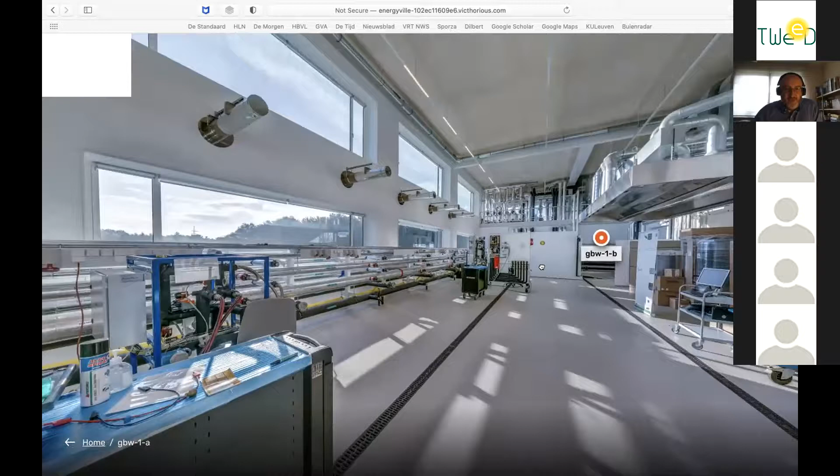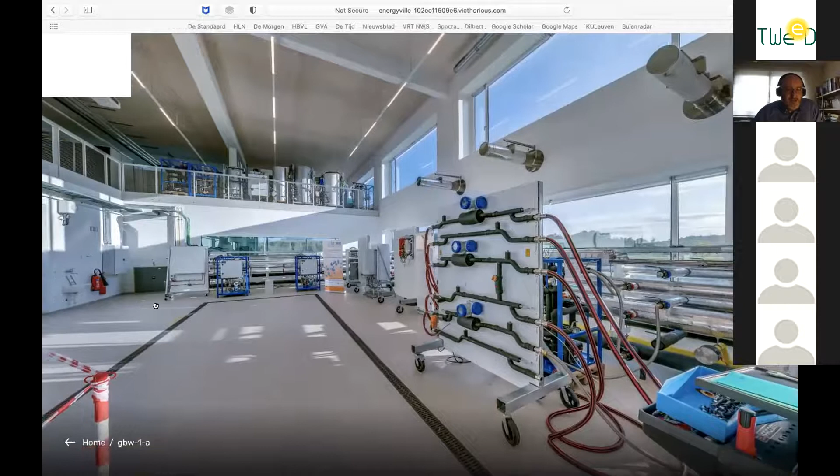There's lots of equipment in the basement. In fact, it's a sort of three-dimensional lab structure, so that allows you to efficiently use the volume and the space of the building. If you look around in this lab, you see lots of tubes there, and that is more common in thermal labs, and all of these tubes are actually emulating different types of thermal grids. We have a steam line there, several types of hot water line, hot oil line, so you can emulate all the generations of thermal grids.

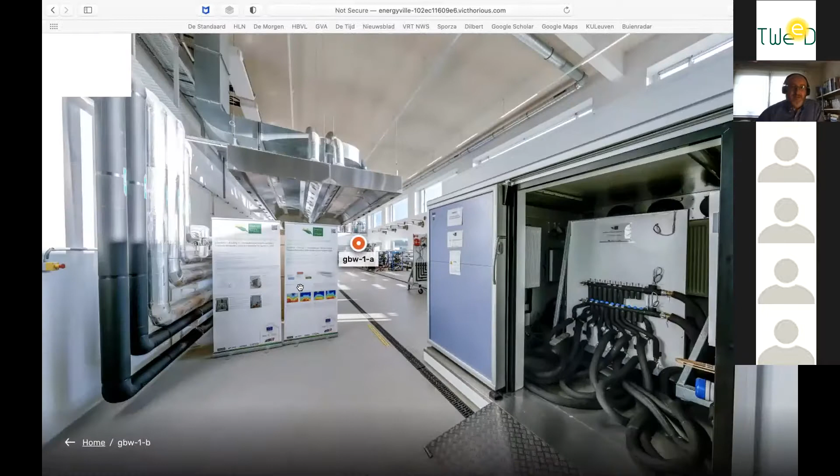If you connect setups like the one you see here to these thermal grids, these are the equivalent of switches, but for hot water. There are several heat pumps in there, thermal storage systems. So in that way, you can test small hot water grids, thermal grids inside that lab. There's climate chambers in there for bigger equipment that allow you to test building elements in near real conditions. Okay, let's see if we can get out.

Yeah, okay, now we went up one floor. I literally took the stairs in the corner there, and then we entered the home lab, actually on the second floor. The home lab, I'll take a quick look around, is a relatively long lab where we have all of those microgrids and related technologies. If I start left to right, we have our switching station, so the AC power comes in there, and with that copper switching matrix, we can reconfigure different cable systems, because I have to say maybe the most costly part of the whole lab is hidden below those floor tiles.

These are floating floor tiles, and under it are several hundred meters of different types of AC and DC cables. You can re-switch them into loops or long radial feeders from the switching station on. It supplies the AC microgrid part, and as you can see here, it's a relatively open area with lots of markings on the floor. That is because we are currently working on it, and it was cleaned up a little bit here for the photo, of course. But we are reconfiguring it to expand these microgrids.

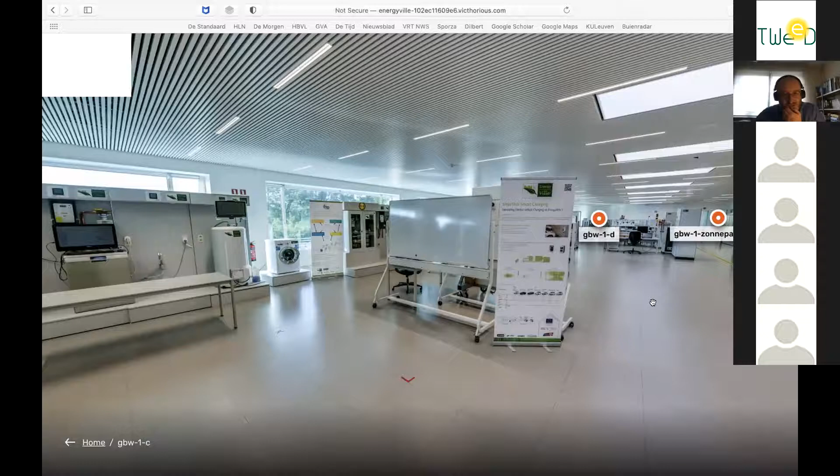But the setups that you still see here, they are used for flexibility tests, demand-side management tests. And if you look well into the back here, you can see the smart meters that are being used in the Flanders distribution grids. All the types are in here, so companies can come here in the lab to test whether they are compatible with all the new types of smart meters, so that they can implement their flexibility services. And of course, we test that on real devices, hot water systems, washing machines, dryers, dishwashers, so we always have clean clothes and clean cups of coffee as a free gift.

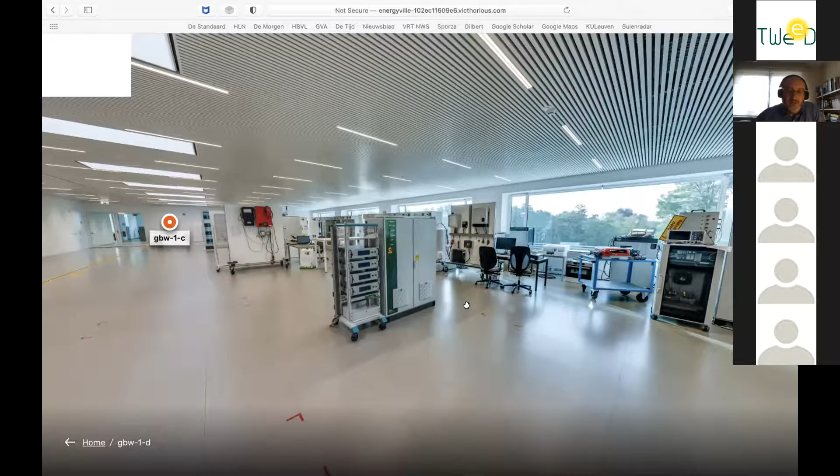If you go further down the lab, you see, this is a testing zone where we can see on the floor that there are several markings made. That is setups that need to return there. But this is the testing zone for the DC systems and the photovoltaic systems. So you can recognize some solar converters with battery systems in the back there. We do a lot of performance testing on them, measuring their real efficiencies, because don't believe too much of the efficiencies that manufacturers are putting on them.

We have here an interface. This is actually literally the border between the AC and the DC part of the lab, because from here on we have the testing zone with all the DC equipment. It may look like an ordinary lab with tables to you, but I can tell you the technology that's in there is totally different. Every cabinet is a DC station where you can hook up loads, protection systems, and so on. It can go, as I said, up to plus minus 500 volts, but we also do the smaller things, like this is a 48 volt office setup that is also used in LED lighting.

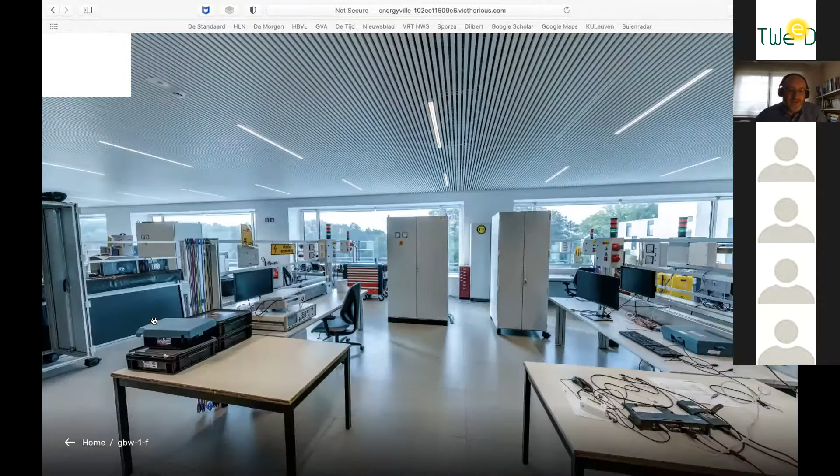If I walk further, this is a typical lab where people working on power electronics are making a big mess. I can tell you this is not how it usually looks. This is way too clean. This is cleaned up specifically for the photo, but I can tell you normally people are soldering here and making power converters, the BMS systems, and so on.

If we go up one floor, we are at the roof, and here on the roof, you can look around. If you want to, you can check the count on the photo, but we've got 1,078 fixed solar panels in different orientations and configurations of strings. Most of them are in some type of east-west configuration. The flatter configuration is east-west, because in that way we have in the morning a bit higher production, and in the evening a longer production, and in the middle of the day the peak is flattened. This fits much better to our building energy demand, and also you can prove that this gives you the fastest payback on big flat roofs with the current prices of solar modules and converters.

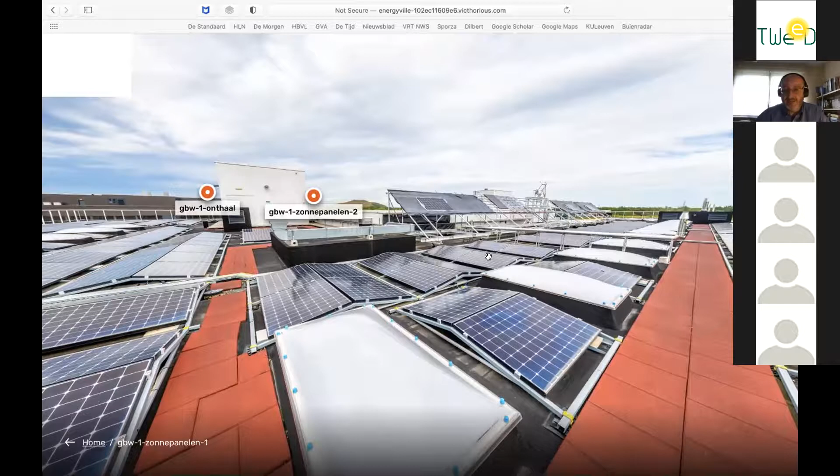If you go a bit further, you can see that we have the flexible test racks. There we can quickly make setups. This is the perfect south orientation. So there they test the more classical setups of solar panels. We gather the meteo data. They do reflection tests. You can see there are different backdrops here. That's for the bifacial panels. We have transparent and non-transparent modules with plastic backsheets or glass types. They're all being tested. They're accurately monitored. We literally produce terabytes of data non-stop in that setup. Of course, our fixed system is also closely monitored for performance and degradation all the time.

This is the other corner of the building. The only spot that is not used for solar panels is this. That's our picnic spot on the roof. That is because the elevator shafts here give us a bit too much shadow, and this is the north side, so you cannot put solar panels there. So we have a picnic spot over there, and a nice place to come with the visitors. Here, by the way, you can look around on the whole terrain. This is the whole Thor Park.

So as Ronnie mentioned in the beginning, we are housed on old mining terrain, and I showed you the mining tower in the beginning in front of the building, but here in the back, and this is roughly 1 kilometer away, you see the old terrils. So these are the artificial mountains with mining material. The whole area in between, it's several square kilometers, is now a science park and nature habitat. So it's always nice to do a walk in the lunch breaks.

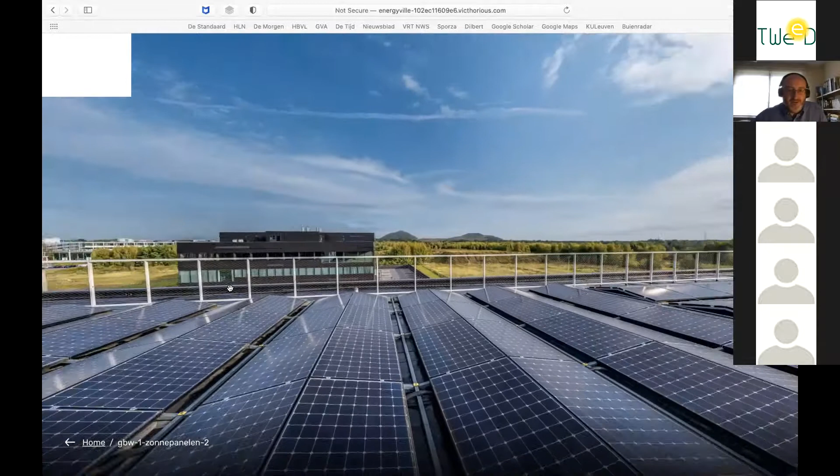Building number 2 is over here, and here is the training center for technicians. And here you see our refurbished old mining buildings and the shaft, which is now a monument. Okay, but let's go down again, because we need to cross the square. So we quickly go down, we take the elevator, we are back into the entrance zone. Let's go out through the door, and we go to building number 2. You see, we had a different architect, so it looks a bit different.

There's also, of course, a zone with meeting places, but behind this zone with meeting places and offices, it's in fact one giant sort of clean room. So if we enter there, now we have changed clothes. We are now wearing such a nice, comfy plastic suit, dust-free, and we are inside the clean room. Now, this is not the highest grade of clean room. It's not the kind of clean room where you can make microchips. This is a clean room that is intended to allow you to make solar modules, battery packs, so the bigger types of electronics. Let's make a tour around the clean room.

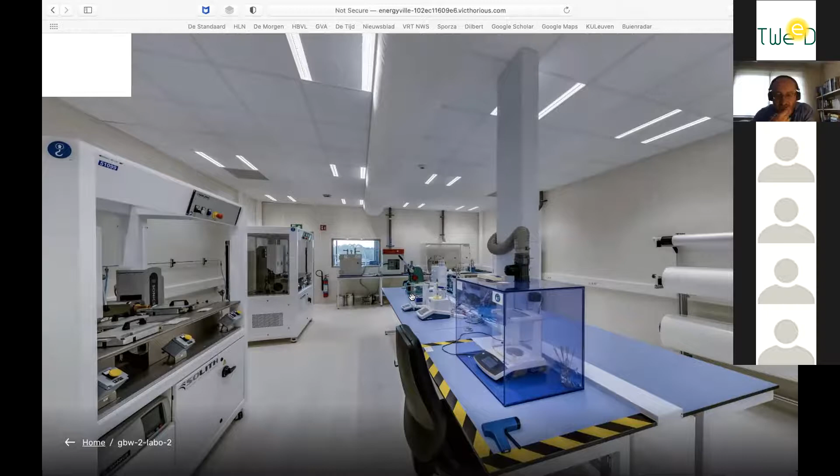If we go through this door, we have here another room inside the clean room. This is a dry room. There you can make the pure battery materials, the electrode materials, electrolytes, and so on, the solid state electrolytes. Why is it a dry room? Water is the enemy of the battery, so you cannot have a single water molecule penetrating your battery, otherwise it will not perform well. So here the air is perfectly dry, and I can tell you, you literally feel that in your eyes. Normally we cannot go in here even with a visitor, so this photo is a rare opportunity

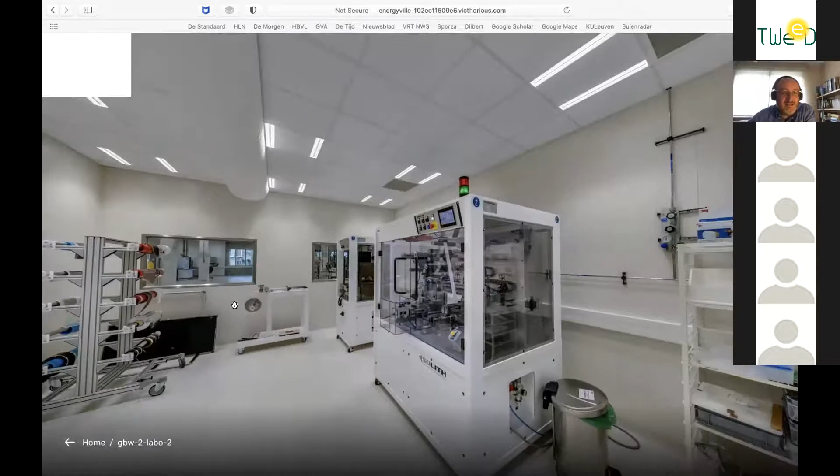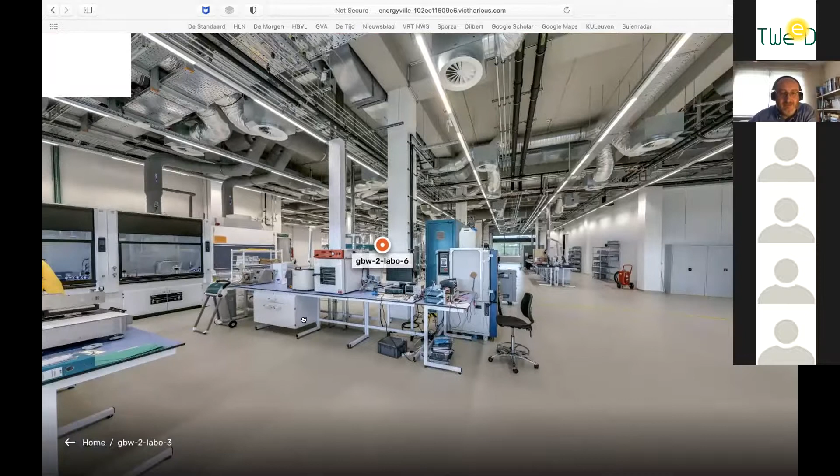to check these things. So you see here it's a quite modern chemical lab, and if we go out and we walk further, you see this is the rest of the equipment to finish off the batteries. It's a big chemical lab, in fact. And on the other side, we have the equipment to make solar modules. Let's see that I move in the right direction. If you go in this direction, here we have the equipment like laminators, or the equipment to handle glass sheets and glue them, laminate them. Here we can make our own small production of solar modules. So different types, for instance, with the cells produced by IMEC.

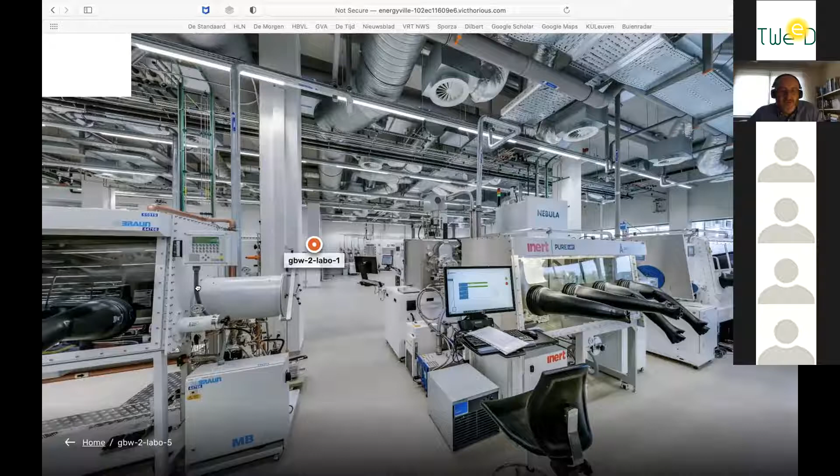Let's see if I missed a corner here. Yeah. This is the rest of the battery testing, the battery manufacturing lab. Sorry, this is the thin film section. I'm a bit lost here, but this is the thin film section, and they not only make the standard silicon-based solar modules, but also thin film sections. And if you look here, it's a bit hidden here, and maybe I can come closer. Yeah, no, unfortunately you cannot see it.

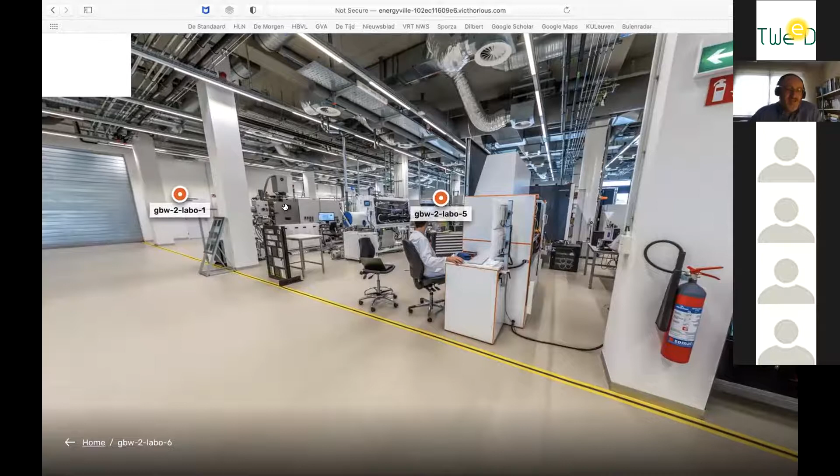Here you see actually a nice application of the thin film equipment. These thin films, you can make them so thin, or you can give them a bit of structure that they become transparent. And here is a demonstrator window where we can have translucent windows which produce electricity. So you can see you can push solar technology very far these days. Start with these cells, and the next question is then how do you put solar converters in the frame of the window? How do you connect them to the electricity grid? How do you make a nice application for a building out of it?

So I think here, with the walk through the lab, we have literally walked through the whole value chain of a lot of these energy technologies that we are looking at, like the solar technologies, the storage technologies. We have the full value chain across these buildings, the materials, the cell production, module production. Then the power electronics was in this building, system testing, system design, and then the whole building, which is a lab on its own. I told you about the BREEAM certificate, and this whole campus, including the historic buildings, is recognized as a sandbox zone.

So we can always test out equipment here also on the public grid, where we have agreements with the regulators and the system operators to, for instance, test new business models, new types of grid support, and even new types of grid technologies, because between these buildings we have a DC line to exchange power, as an example.